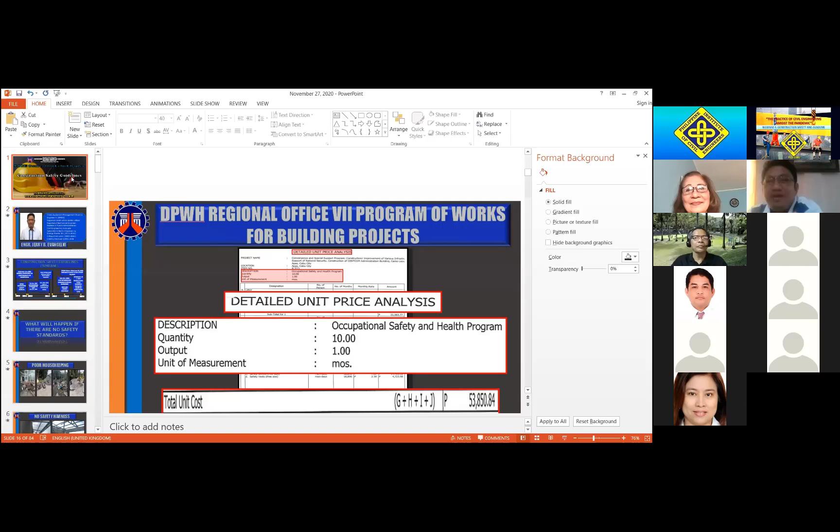I am online. Yes, sir, we can now see your presentation and we can hear you.

Okay, once again, good afternoon to all participants. Thank you, Ma'am Mauri, for the introduction. And before I proceed to the presentation which this prestige institution tasked me to present, allow me first to give my message to this prestige institution. It is really my distinct honor to be invited here. This is my second time. I hope there will be a third and fourth time. Of course, with due respect to my brother, your PICE Cebu Chapter President, Jerry Maratas, for spearheading this webinar in lieu of this pandemic. Honestly, as I perform my functions in the office in DPWH, I am so happy. Through this, I could be able to extend my awareness campaign towards safety practices. So thank you very much for having me.

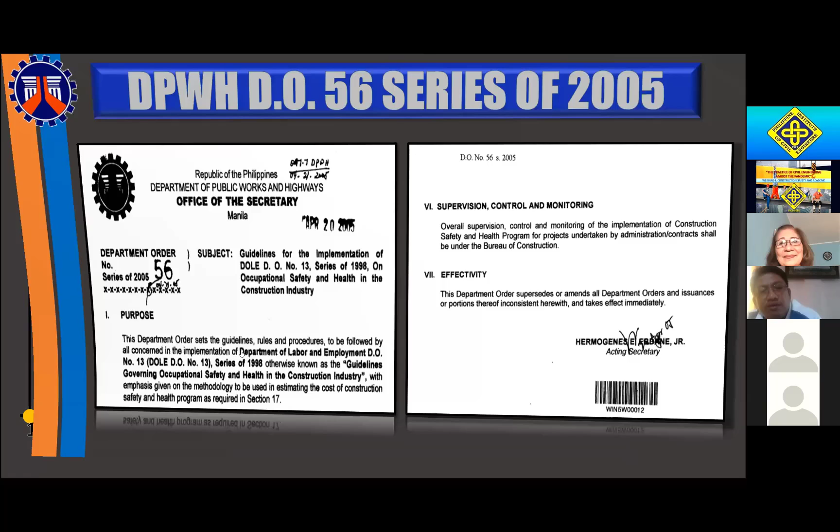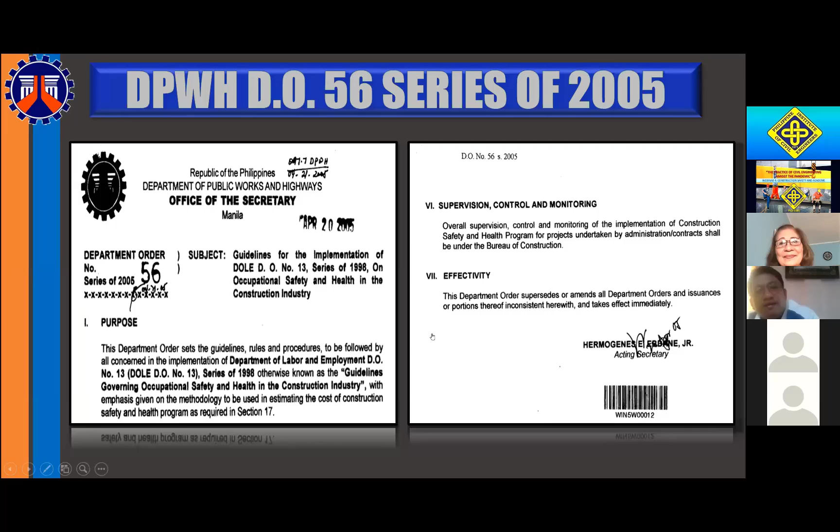In the year 2005, DPWH Central Office disseminated through Department Order 56, series of 2005, the implementation guidelines for DOLE Department Order 13, series of 1998. So in a span of 7 years, the DPWH came to issue the Department Order 56, series of 2005. If you notice on the screen, on the subject: guidelines for the implementation of DOLE Department Order number 13, series of 1998. And then back to the timeline.

It was signed by Hermogenes Ebdane Jr., the acting secretary of that year.

Now, considering that Department Order 56 series of 2005 was disseminated and practiced in DPWH, another improvement or upgrading of safety practices came. In the year 2014, DPWH issued Department Order 129 series of 2014, the CHSP of contractors engaged by DPWH.

Now, before, there were two schemes adopted by DPWH: project by contract and project by administration.

So for that year, 2014, DPWH issued these guidelines exclusively for our project contractors. If I may read this subject: guidelines in the implementation of the memorandum dated July 17, 2014 of the Secretary of DOLE, on the procedure in the evaluation of the Construction Safety and Health Program, CSHP, of contractors engaged by DPWH, pursuant to DPWH Department Order number 56 series of 2005.

So that is the subject of this order. It was signed by then Secretary Rogelio L. Singson.

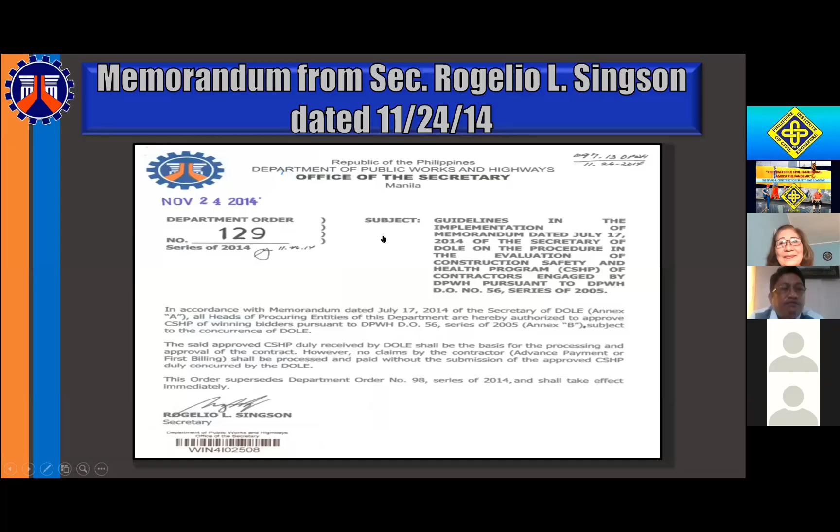Back to the timeline. After 2014, on the year 2015, there is an improvement in the cooperation and collaboration of each agency, particularly the Department of Labor and Employment, and DPWH. On the year 2015, a joint memorandum of agreement on construction safety and health program was initiated and disseminated.

It was signed by both the Secretary of the Department of Labor and Employment, then Rosalinda Dimapilis-Baldoz, and the Department of Public Works and Highways, then Secretary Rogelio Singson. So this is all pertinent to the implementation, again back to the mother department order introduced by DOLE, DO 13 series of 1998.

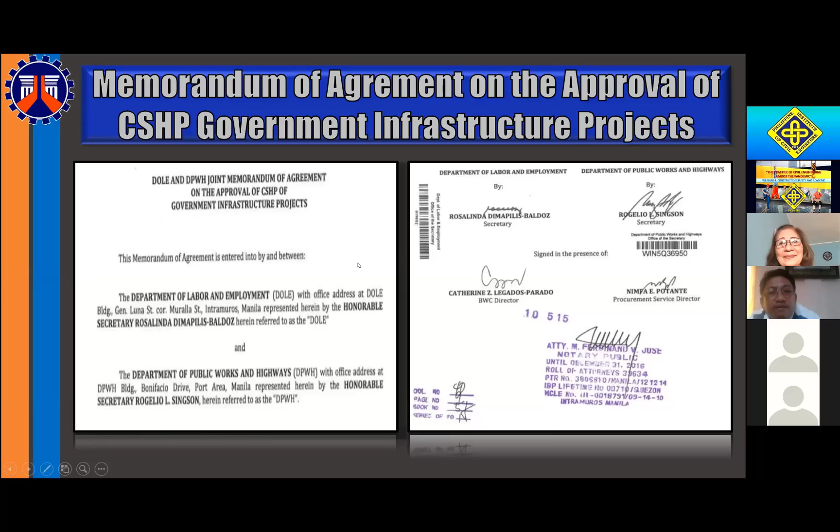So after that year, 2015, from 2015 to 2018 - this is what I consolidated and summarized. I summarized the guidelines, which is very particular, and that's why I presented it like this, straight line by year, for you to be guided.

On 2018, directly, Department Order 13 series of 2018 was disseminated to all regional offices and district engineering offices on the cost estimate for signages and devices. That was dated January 18, 2018.

So from here, actually this applies to both projects implemented by DPWH, roads, and vertical and horizontal projects. On this department order, stating all the standard and sample itemized computation of all safety standards and signages incorporated in each program of works, now even in the detailed unit price analysis attached to the plans and programs that is scheduled to the procurement.

So this construction safety and health program incorporated in the program of work is a line item, a pay item of the project implementation, meaning pay in two schemes: either it is procured or rented.

So from 2018, now back to the last paragraph of this order, I would like to read it to you. This is the last paragraph of DO 13 series of 2018. Back to 2018, DO 13 series of 2018: in the last paragraph, this order supplements the existing DPWH Roadwork Safety Manual series of 2004.

DO number 56 series of 2005, guidelines for the implementation of DOLE DO number 13 series of 1998 on occupational safety and health in the construction industry, and DPWH DO number 36 series of 2007, provision and installation of road safety devices along critical sections of all DPWH preventive maintenance, asphalt overlay and reblocking projects, and DO number 103 series of 2016, guidelines in the preparation, provision and maintenance of traffic control as a pay item in the approved budget for the contract, ABC, on infrastructure projects.

So as I've said earlier, there are a series of department orders that I deleted or did not include, considering that this very important Department Order 13 series of 2018 supplements the previous orders or guidelines DPWH disseminated. So this Department Order 13 series of 2018 comprises all the standards from the mother DOLE DO 13 series of 1998 up to the 2016 Department Order, stating or emphasizing preventive maintenance and other projects that involve safety compliance.

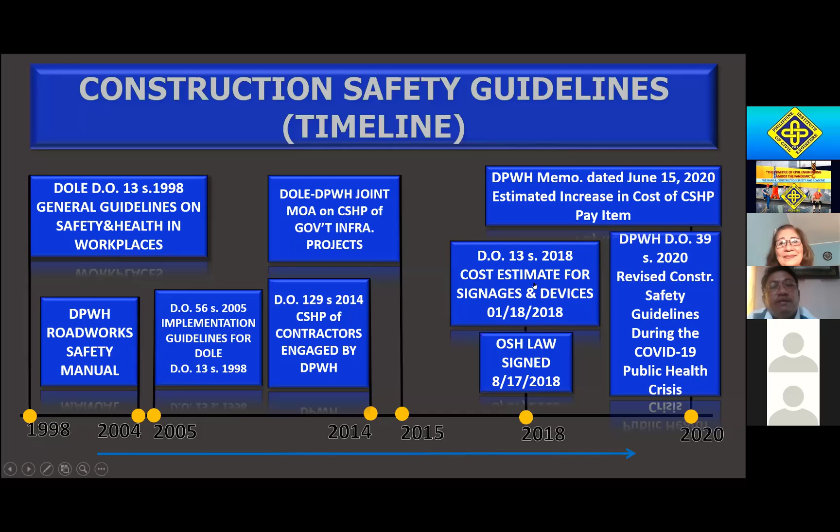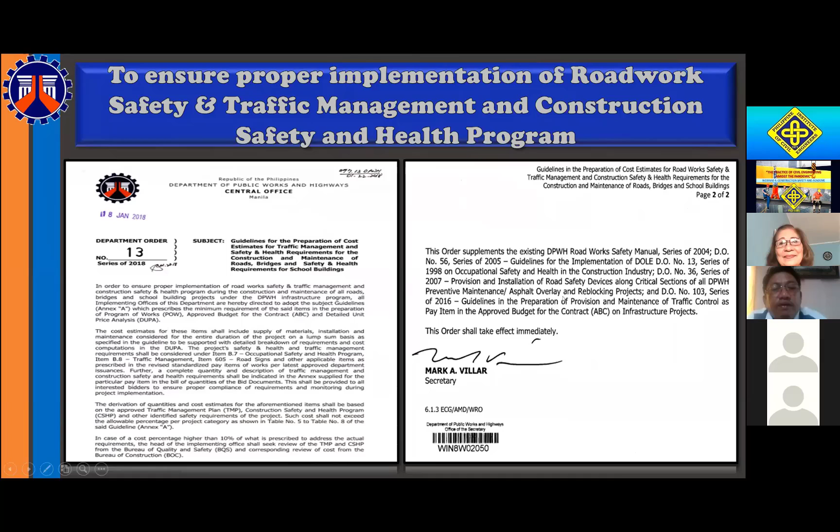Now for this, I said the DO13 series of 2018. I would like to show you the caption of this, or the cost estimate sample and the placement under this Department Order 13 series of 2018. Please. Slide, next please. Next slide, for DO13 series of 2018.

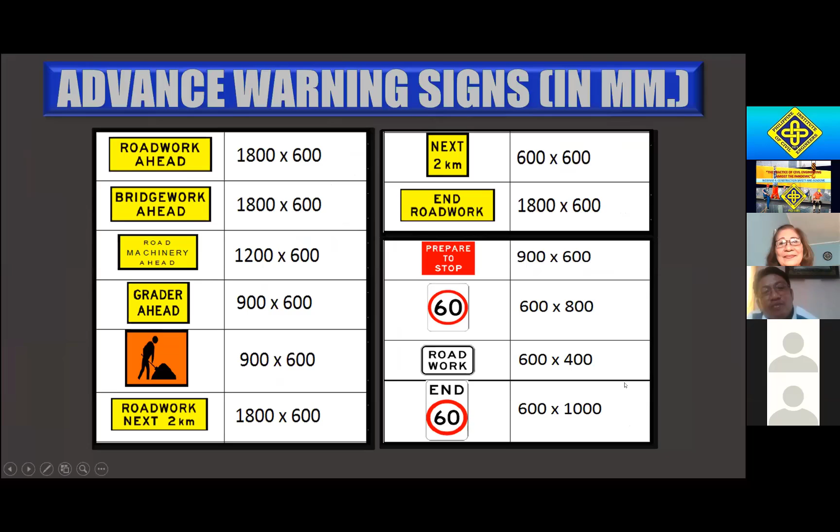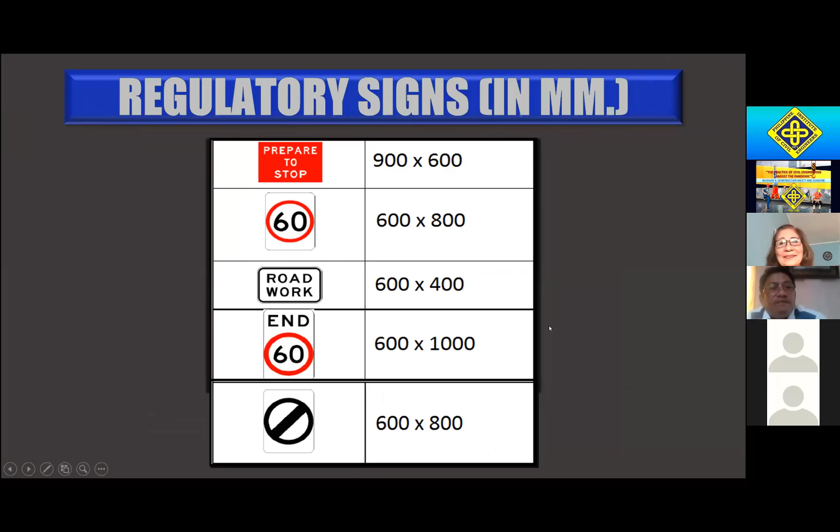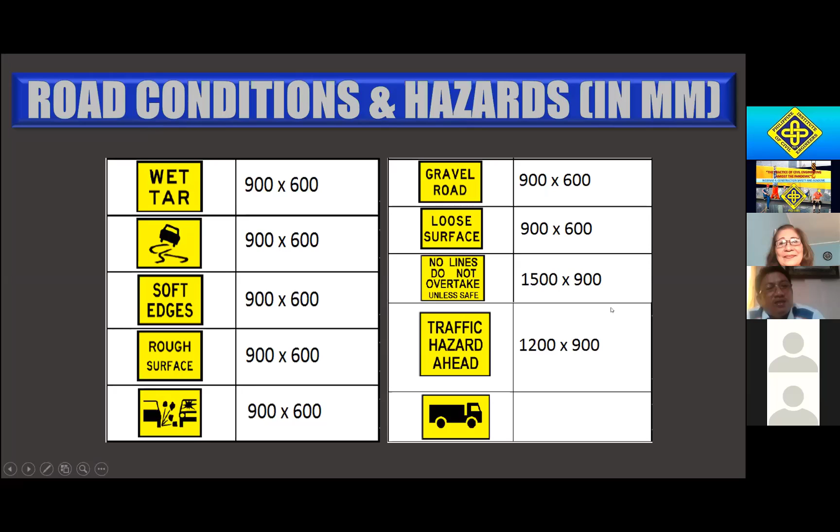So these are included in that Department Order 13. If you will notice, in every signage there is a dimension. That is why we called it standard signages. When we say standard, of course, with the same dimension as you look to the other projects. So these are the standards under that DO13 series of 2018. The speed regulations, detour signs, all in millimeter. The dimensions are all in millimeter. wet tar, soft edges, gravel road, loose surface, traffic hazard ahead, and so on and so forth.

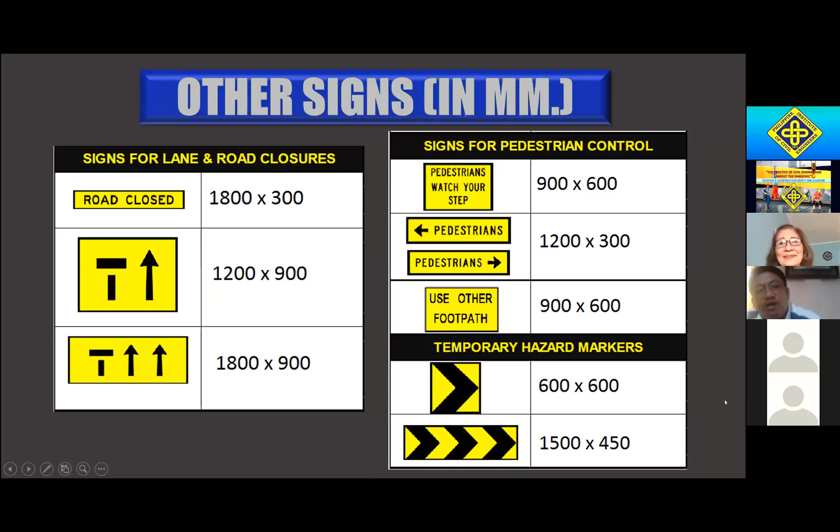So there are common temporary hazard markers that were used. For this, one chevron has its dimension, 600 by 600 millimeters. And three chevron sign, 1,500 by 450, including the color. So this is tall. And what is stated in this Department Order 13 series of 2018 is applicable to all DPWH projects. So for uniformity and standard, I always emphasize this color, the black and yellow combination. For other signages under this DO13.

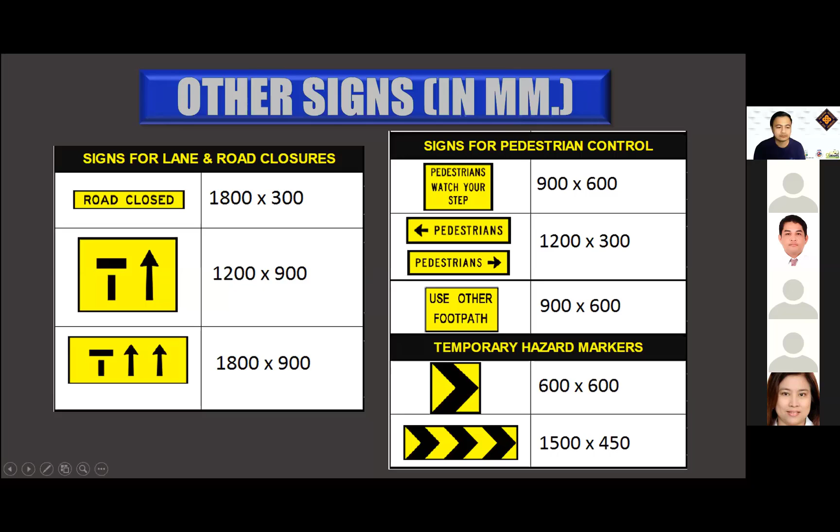Next please. Na panel. This is very common again. And just last week, I noticed this standard sign panel of appropriate sheeting. These signages - if I remember, in back of the CTU building, going SRP Road, the project implemented by Cebu City District Engineering Office, I noticed this signage with standard vertical height of 1.5 meter.

So again, I always emphasize this during my awareness campaign in the district and even in the regional office presently. To have uniformity and to become implementing standard guidelines, we always implement and fabricate a standard dimension. The height should not vary, because all of this we can see in the DPWH guideline, the Department Order 13 series of 2018. So there are implementing offices that implement what is in the guidelines, but sad to note, there are offices that implemented also substandard signages. That is why up to this moment, it is my struggle how I could influence, how I could inform our project contractors and even the implementing offices of this region to follow the standards, what is stated and what is in the DPWH guideline DO number 13 series of 2018.

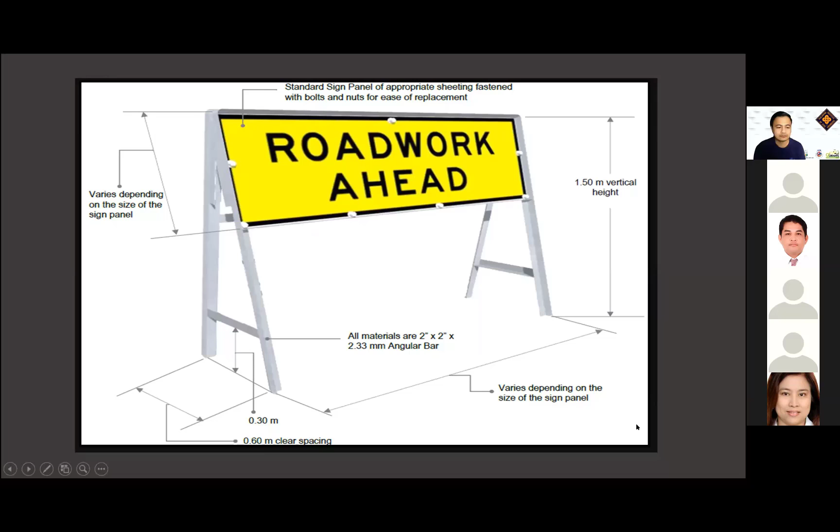So another placement, or another signages or warning devices. Next slide please. This is very common also. If there is a deep excavation - within Metro Cebu I inspected, I noticed one of the districts within Metro Cebu has a deep excavation project, considering the shoulders with like this wire mesh barricade, or this is commonly called construction mesh fence. So if you notice, again there is a dimension given, and this can be extracted in the guidelines of DPWH. Nothing to worry about the dimension because it is all given in that guidelines.

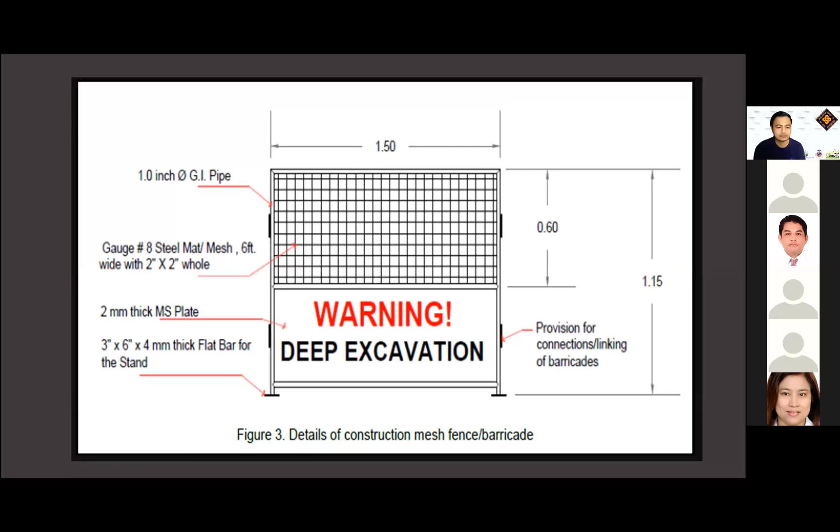The next standard is safety signages and barricades. Another very common one, this is called the traffic cone.

And especially has its own spacing, which is on tapers 3 to 5 meters. Small worksite confinement from 3 to 5 meters. And for longitudinal separation from 10 meters to 20 meters.

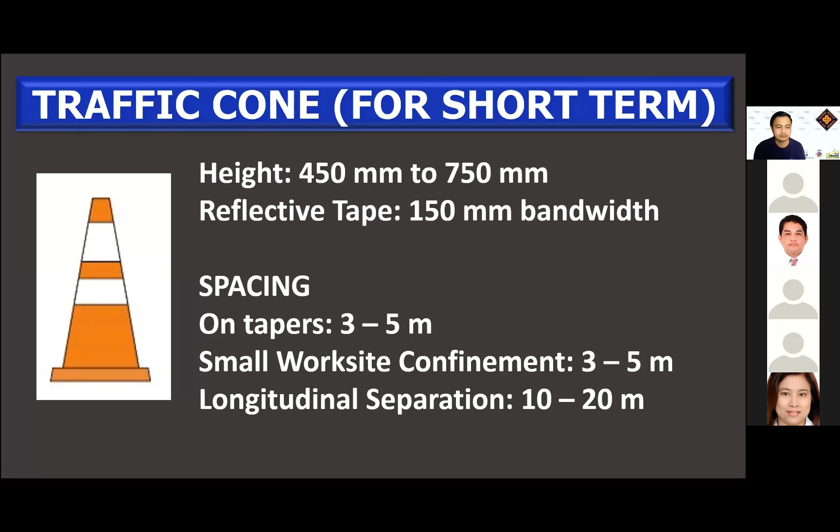So the next safety standard. Now, if you notice this, from traffic cone to bollard. So in the project, it depends on the planning engineers who prepare the program and what is applicable to a certain project. But very common, we use this bollard for short and long term, again with the standard height of 450 millimeters to 1,000 millimeters.

Again, emphasize that there should be a reflective tape with 250 millimeter bandwidth. The same with the traffic cone, it should be between 3 to 5 meters spacing. We do not exactly look after the standard spacing, but sometimes applicable and not applicable. But all we want to see is there should be a spacing.

Now, maybe you can adopt 2 meters, 5 meters and beyond, but here, based on the standard, from 3 meters to 5 meters spacing in small worksite confinement, and in longitudinal separation from 10 meters to 20 meters.

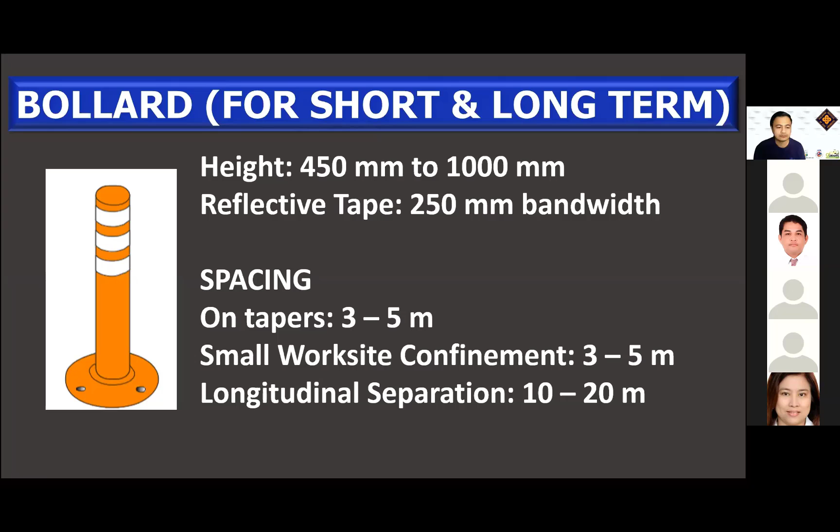Now, if you look at this, I notice, or I happened to conduct an inspection in Cebu South, and I appreciate the efforts of the Cebu 4th District Engineering Office back in the year 2019, when they implemented the road construction along the coastal road, going to kilometer station

120 to 130, if my memory serves me right. I appreciate the flasher light installed in the midway of the project site. Yes, I really appreciate the effort. It is very useful and visible for the motoring public during nighttime.

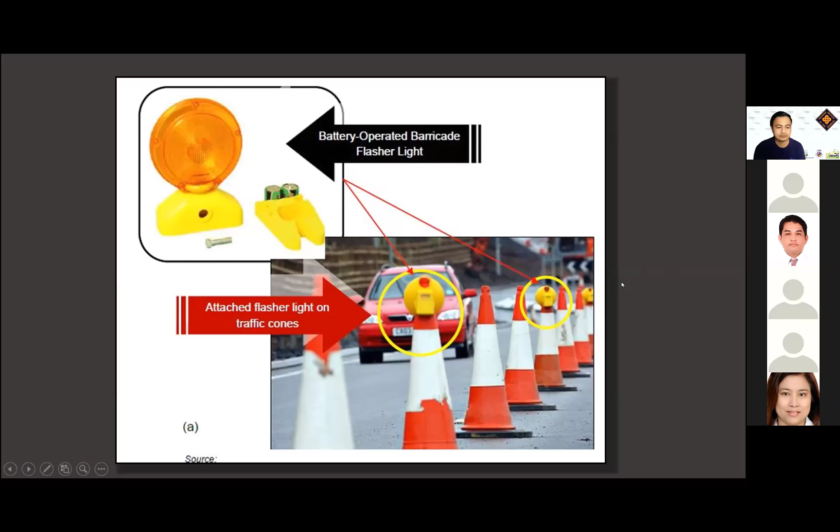Next, please. Now, under this Department Order 13, series of 2018, there are some layouts and placement for road projects. And this is it. There is a construction project site here in the right portion, and this is the placement.

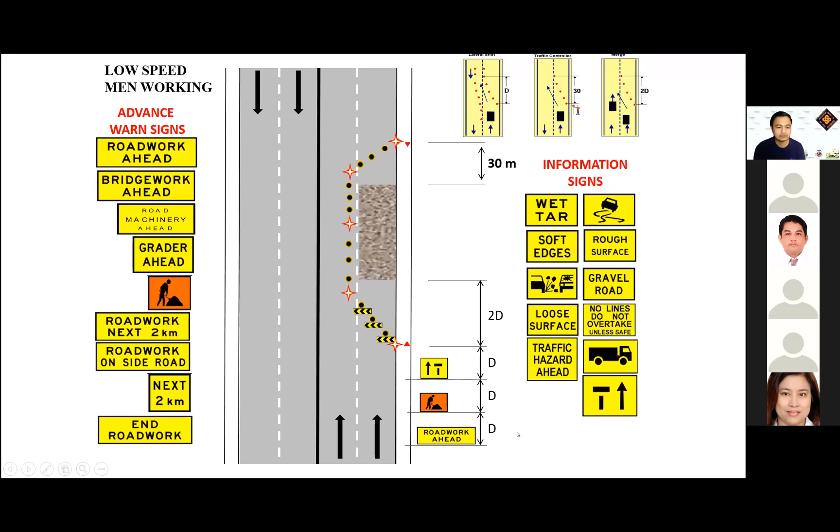Again, this can be extracted from our Department Order 13, series of 2018, for our private partners here for you to follow. If you are contracting DPWH projects, they should be followed. If you notice, for a 4-lane road with 1 lane closed on the right portion, this is the placement. And if you consider this a center road project site, this is the placement.

Share with me an impression of a road with this placement, visible during nighttime with blinkers. I know you can share with me the feeling that our project partners are also sensitive of what the community, what our people observe, that we in government, particularly in DPWH, care for them.

If you will notice, there is a blinker from the start. If you're going back and forth directions, this is the placement. Next, please.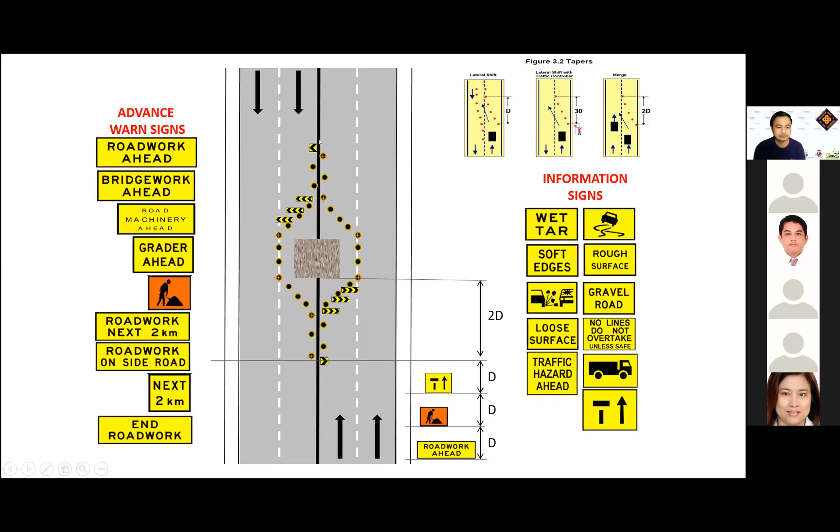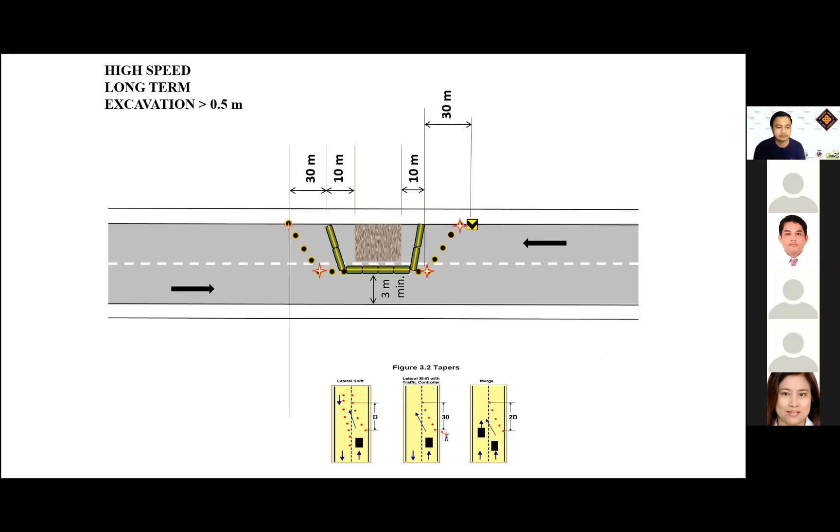Now, another placement under DO 13, series of 2018. Again, I will always emphasize this standard can be extracted in Department Order 13, series of 2018. So this is the placement.

From the start of the speed regulation, if you notice the number 40 represents the speed regulation. So it follows the signage, a road work ahead, or because it is symmetrical, this placement will be reflected also on the other side.

So what is public going up to the project site, that signage also will be reflected. If you notice, there are similarities. So stop, and then men working ahead. This is a symbolic sign for men working ahead, the color orange, and then prepare to stop.

There is a traffic controller, or commonly called the flagman. If you happen to pass by going Cebu South, we have a project implemented there. Personally, I talked to the flagman, and I appreciate that there is a placement, a traffic controller, and a smooth traffic flow.

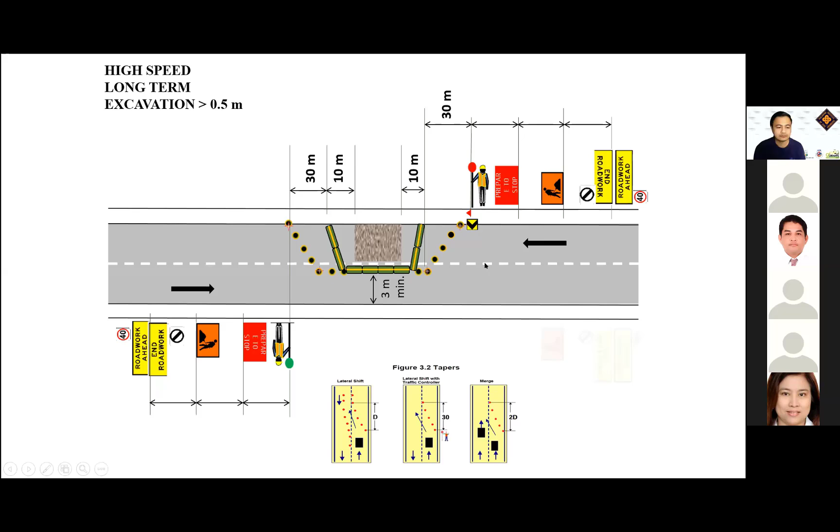Next placement, please. So this is symmetric, that's why both sides will be considered placing standards. Now aside from our horizontal projects, we have also implemented vertical projects like school buildings.

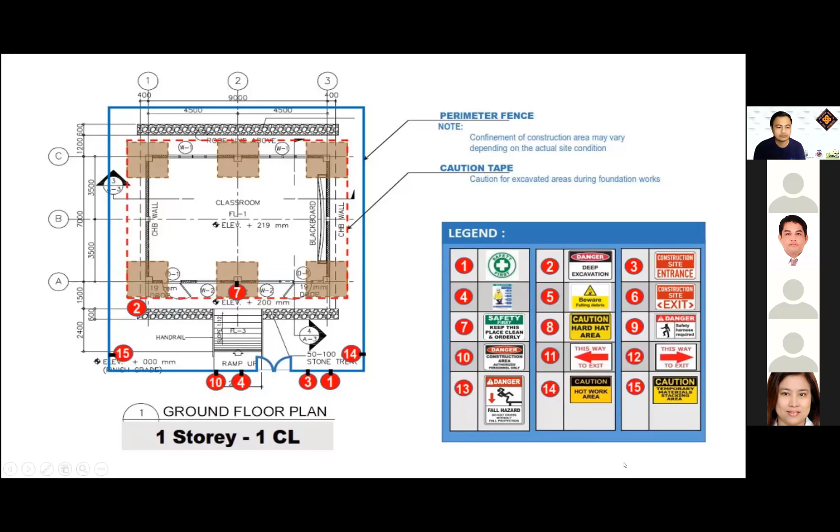So both vertical and horizontal has its own placements. Under this, again, Department Order 13, these are the standard. Now for one story, one classroom, ground floor plan, these are the setup. So for one classroom, then next please. There is a legend.

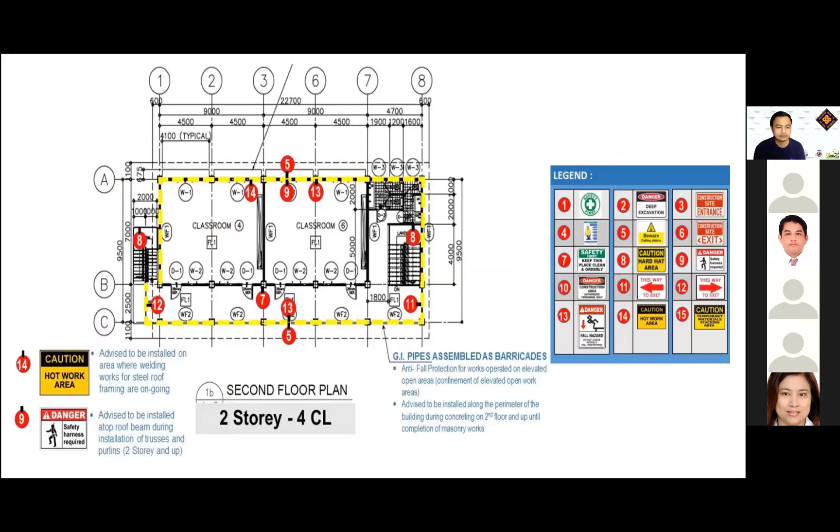For two-story, four classroom, and so on and so forth. For two-story classrooms, this is the setup. Two-story, four classroom, second floor, this is the setup. So next please. Next please.

Now for the preparation of the program of work, under this Department Order 13 series of 2018, given the project category level of improvement for road, to paved concrete. This is a sample of how to prepare the construction safety and health program of each project. So there is a percentage of cost. I know if there are project engineers and planning engineers here who attended the webinar, they are familiarized with this.

But there is an important message at the bottom. Note: derived percentage of cost of construction safety and health as per project requirements relative to civil works is advisably lower than the values above, or within plus 10%. I know they are familiar with this, but this is given in the guidelines that I always refer to.

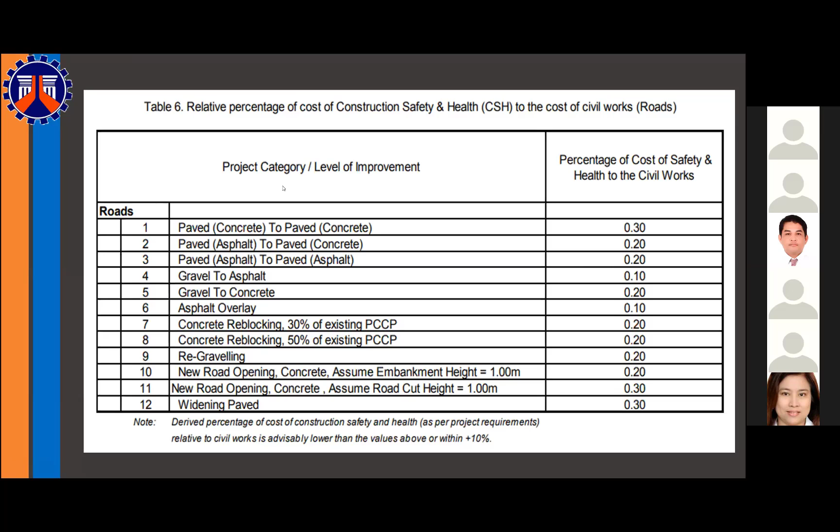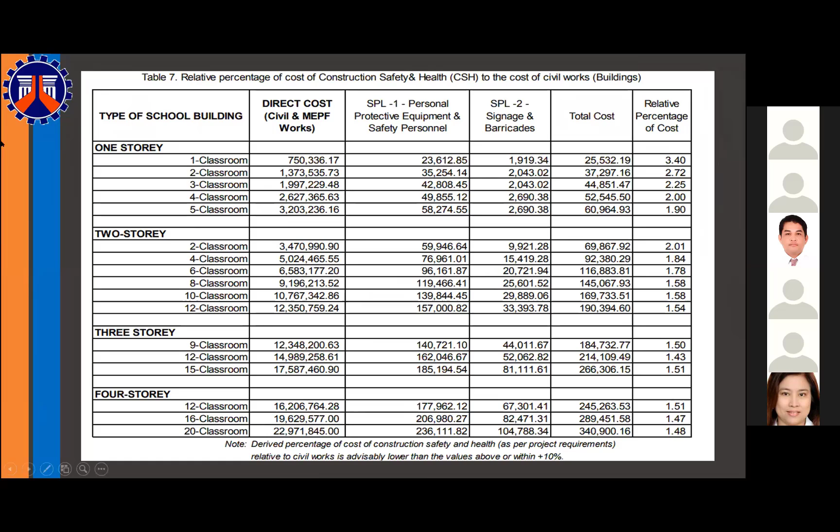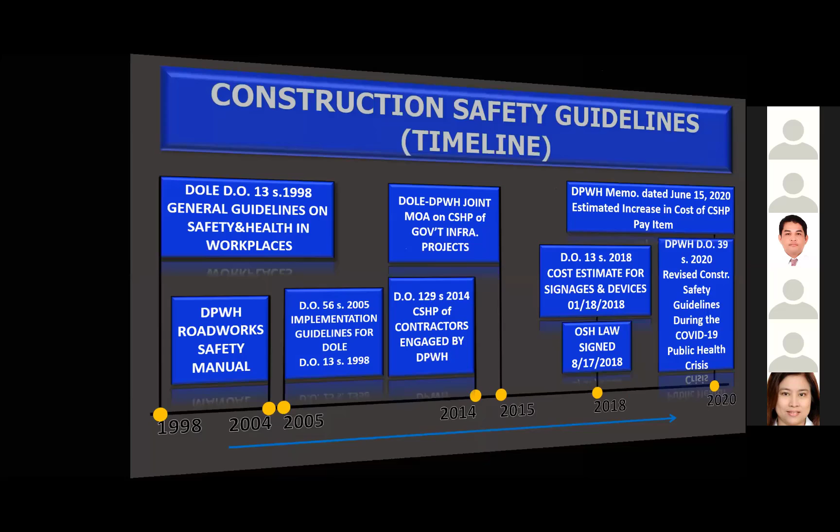And personally, I say to, and I always told my counterparts in the district, that our construction safety and health program now has the power, or the implementing arm. Kung sa Bisaya pa, naa nay ngipon. Because this is now a law of the land, the Republic Act number 11058. Next, please.

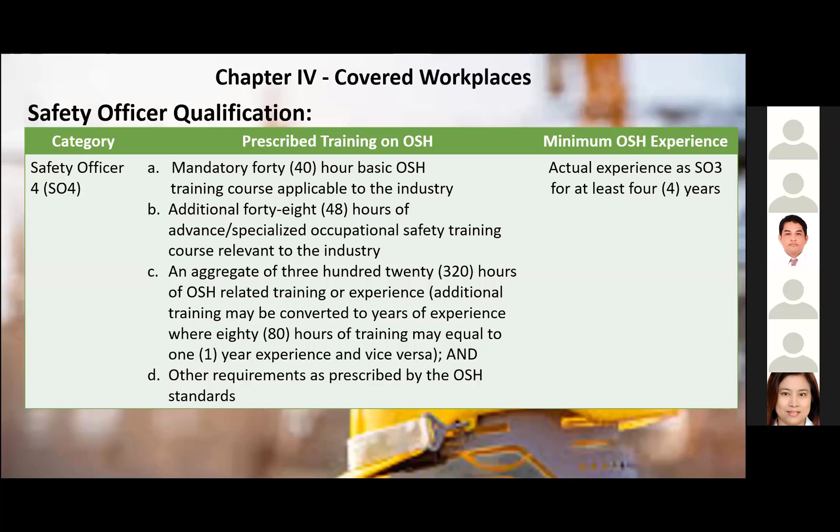So back to the timeline. I am allotted to give you a presentation for 1 hour. That's why I summarized it, because in every orientation I conducted, I always consume 3 hours. But for this prestigious institution, I summarized it, and I will make it 1 hour. And please, Secretariat, inform me if I still have available time.

Please, you have 5 minutes left, sir. I still have 5 minutes.

Yes, sir. So, from 2018, DPWH memorandum dated June 15, 2020 was disseminated. But before that, DPWH, during this pandemic crisis, back to the timeline, before this, DPWH introduced Department Order 39 series of 2020, revised construction safety guidelines during the COVID-19 public health crisis.

And this is now the update. So I've said, all of this I introduced and informed during the orientation I conducted, but this is the latest update. The department, because of this pandemic, disseminated the Department Order 39 series of 2020. The subject, revised construction safety guidelines for the implementation of infrastructure projects during the COVID-19 public health crisis, repealing Department Order 35 series of 2020. So in our projects now, and I do hope now in 2021, because we are, or other district engineering offices, procured already.

And if really they are incorporating now the COVID-19 standards, safety standards, or construction health program, considering COVID-19 for our 2021 projects. And it's good because this department order dated May 19, 2020 was disseminated because of this health crisis we are suffering.

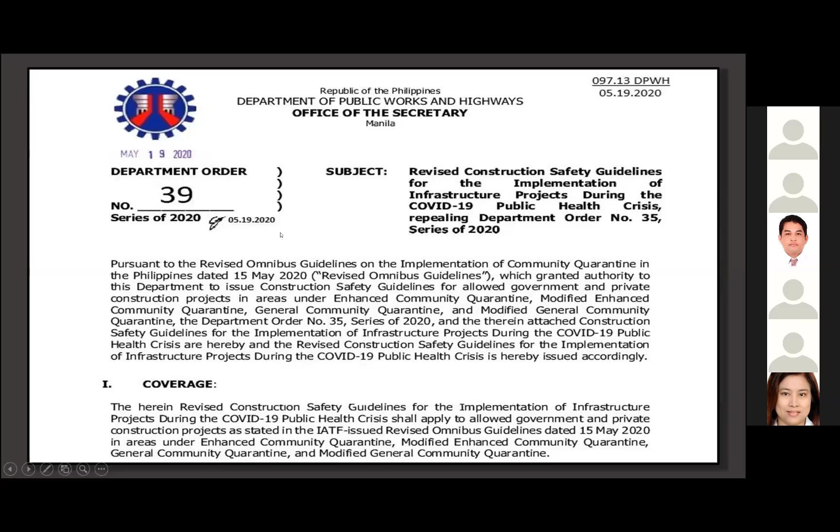Now the next slide please, the timeline. And the last part, the latest part—no, the timeline please.

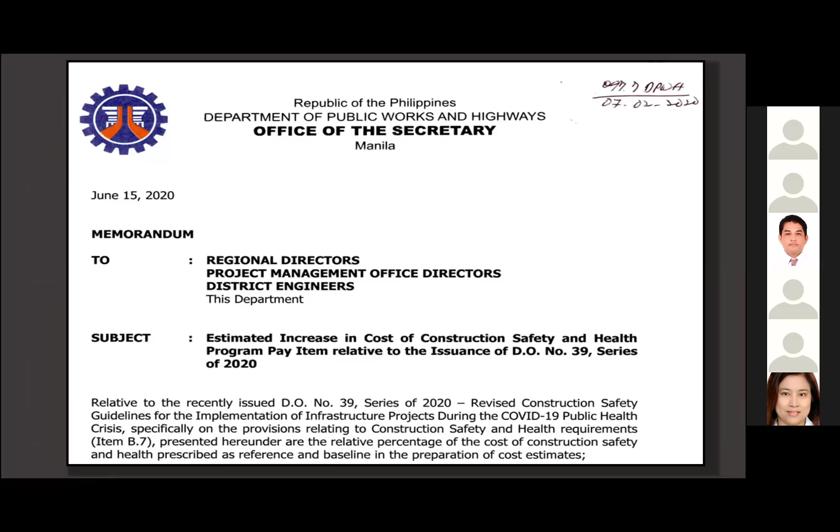In the issuance of DO 39 series of 2020, it follows the memo dated June 15, 2020 from the Bureau Director of the Bureau of Construction, Director Eric A. Ayapana, with subject: estimated increase in cost of CSHP as a pay item. So I would like to show you how it goes, how it is increased and how it is programmed. Memo to regional directors, project management office directors, district engineers of this department—subject: estimated increase in cost of construction safety and health program pay item relative to the issuance of DO 39 series of 2020.

This is dated June 15, 2020. Now, under DO 13 series of 2018, there is a standard factor that the programmer or planning engineer has to consider—like project category, level of improvement, from paved concrete to paved concrete, which is a factor of 0.3 from DO 13 series of 2018.

Now the updated version considers safety measures for COVID-19, with requirements for complete PPE. From 0.3, there is an increase to 2.9, considering complete PPE including full utilization of face masks, eye goggles or face shields, a full-time safety officer as per Republic Act 11058, a full-time first aider, two sanitation aides, materials and facilities for regular disinfection, temperature checks, and COVID-19 rapid testing. That's why this was disseminated and initiated by our Bureau Director of the Bureau of Construction, for our planning engineers to adapt and incorporate into the program of works for our 2021 projects, considering that the COVID-19 pandemic is still existing in 2021. Wala pa mang vaccine, so this will still be applicable because COVID-19 still exists.

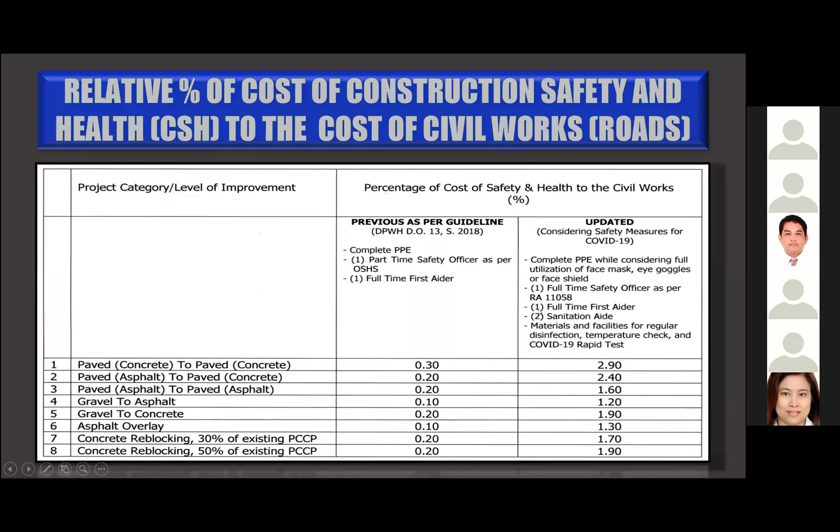Next, please. So there are computations for graveling and other factors like widening, with a factor, a percentage cost, and an increase. If you notice, there's a previous and an updated value—the previous is stated in DO 13 series of 2018, and the updated one is the latest disseminated computation. Of course, still take note of the notice at the bottom.

Now, there's always an allowable range. The right percentage cost of construction safety and health, as per project requirements relative to the civil works, is advisably lower than the values above, or within positive 10%.

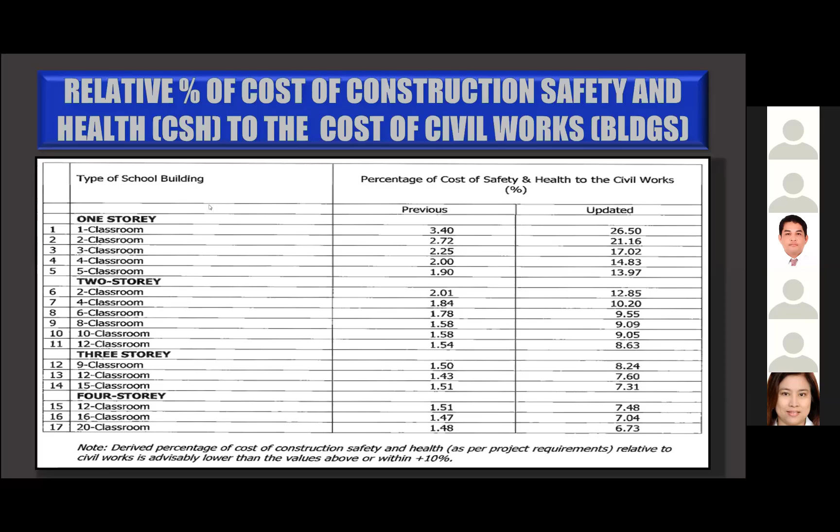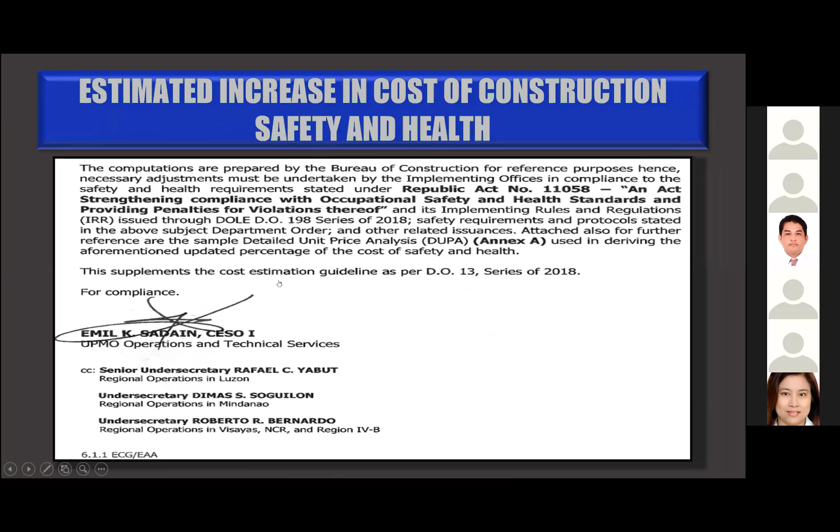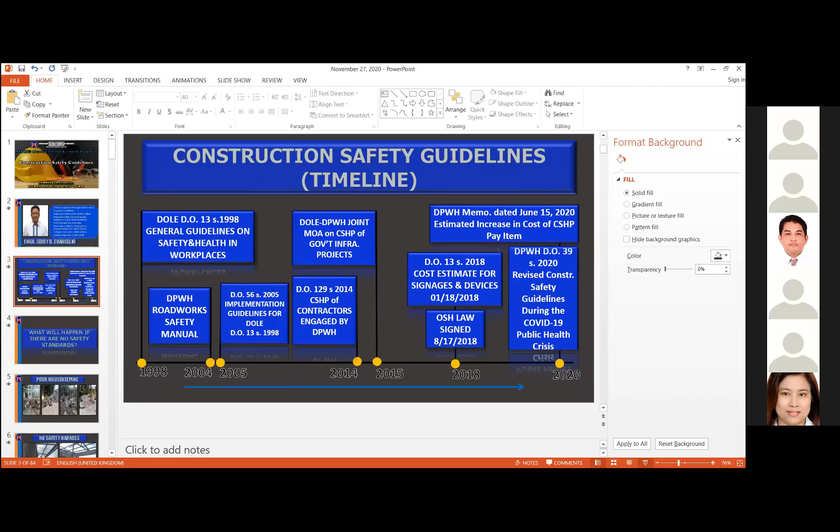Back to the timeline. And for my closing—this estimated increase in cost of construction safety and health was signed by Undersecretary Sadain.

And for my closing, as I've said earlier, it is my great honor to be your speaker, considering that the topic involves DPWH guidelines, which from 2017 up to the present I always emphasize, coaching our planning engineers to incorporate construction safety and health programs in our projects and even in the district. So until now, there is still a struggle for me. I hope with this prestigious institution, through the project engineers and civil engineers present, to further this endeavor and objective of mine—to coach, to educate, and to make everyone aware through this presentation. If you implement projects privately, and particularly if you implement projects in DPWH or any other government agency, I hope with this little knowledge you have, you can share it, tell them, and coach them that there should be a construction safety and health program in every project. If you are contracting with DPWH, there is a DPWH standard construction safety and health program that should be followed.